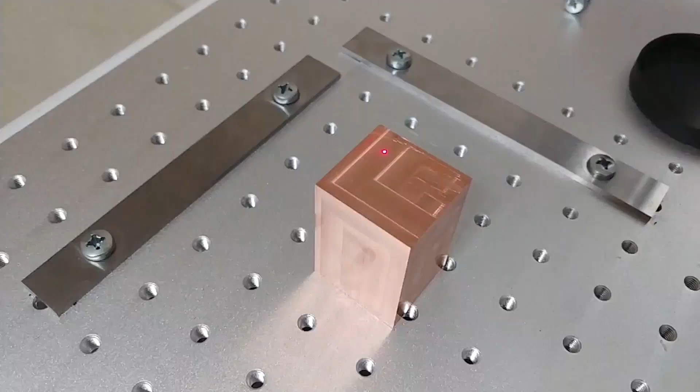Somebody mentioned in the comments of my previous copper marking video that they were having some trouble getting depth in copper with a 50 watt laser, and I've got a 20 watt laser, so I figured I'll give it a shot and see if I can do it.

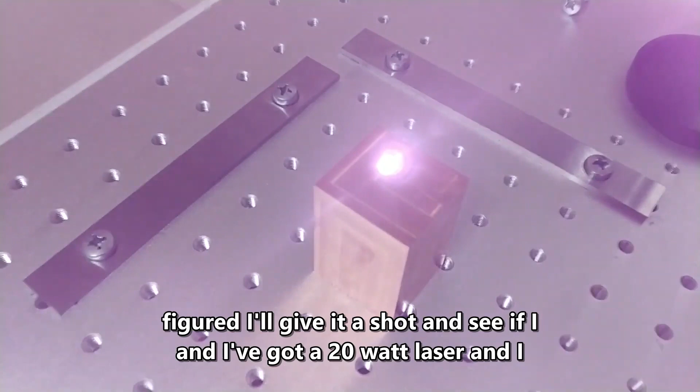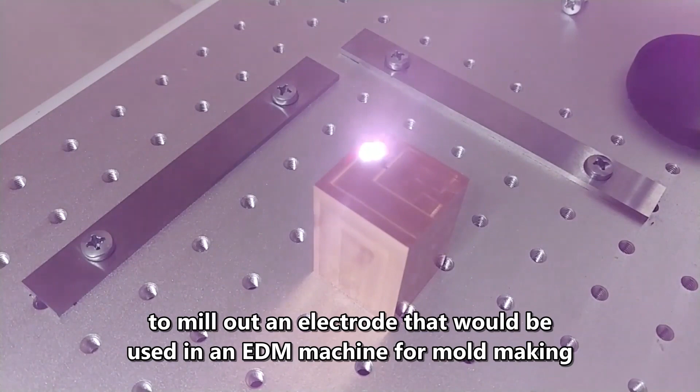What you see here is EDM grade copper, and I'm not positive what that means, but it is what you would use to mill out an electrode that would be used in an EDM machine for mold making. This block has been squared off, and I've already started to mark it. What I'm doing here is just marking an X, and I'll go through the settings right now.

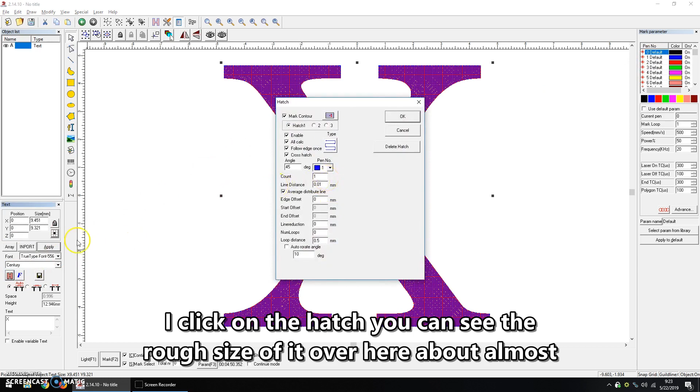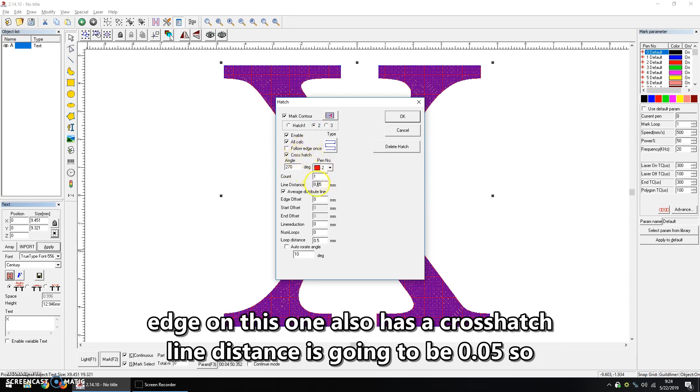These are the settings I used for this X. Let's go to the hatch first. If I click on the hatch, you can see the rough size, about almost 10 by 10 millimeters. I'm using this pattern for the hatch, enabling everything including a cross hatch starting at an angle of 45 degrees. I'm using pen number 1, a line spacing of 0.01 millimeters, and I'm also doing a second hatch at 270 degrees. This is a different pen, pen 2, not following the edge on this one, also has a cross hatch. Line distance is 0.05, so that'll be a lot faster.

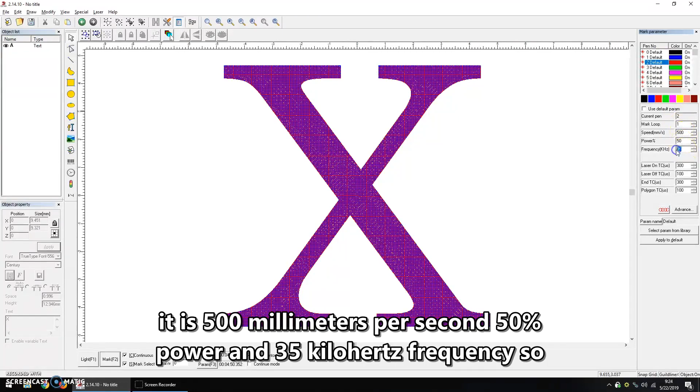I'm going to cancel that, deselect the X, go to pen 1. My pen settings are 100 millimeters per second, 90% power, this is a 20 watt laser, and 20 kilohertz frequency. For pen 2, for the second hatch, it's 500 millimeters per second, 50% power, and 35 kilohertz frequency. Total marking time here was just under 5 minutes, at 4 minutes 50 seconds.

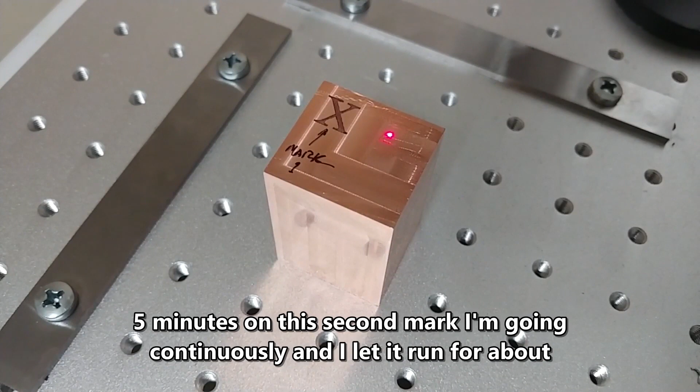There's a little bit of debris that needs brushed off on the top, and the mark will look a little bit better after that. I'm going to mark another X, and then we'll take this to the surface plate after that and actually see the depth. On mark 1, this was just set to run continuously, and I let it run for about 5 minutes. On this second mark, I'm going to have it run for 8 total repetitions. So it's going to go right there, let's do it.

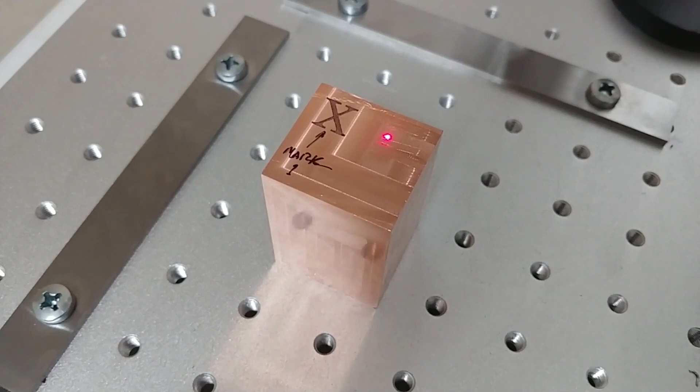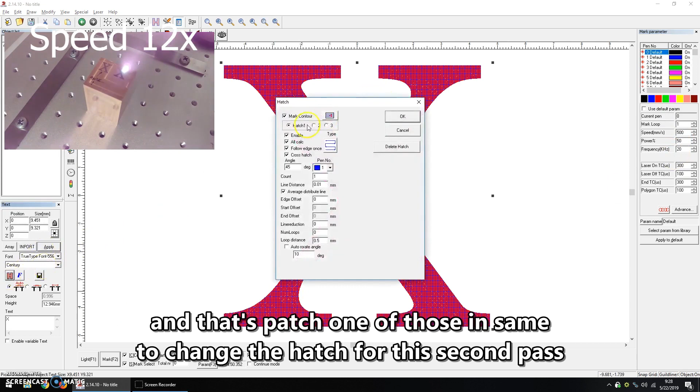For the second attempt, I'm going to get a little bit adventurous, and I'm going to leave pen 1 settings the same, but pen 2 I'm going to change to 700 millimeters per second with 50% power and 50 kilohertz frequency. I'm also going to change the hatch for the second pass, hatch 1 is going to stay the same, hatch 2 is going to be 0.03 millimeters now. I'm going to leave the angles the same and everything else the same.

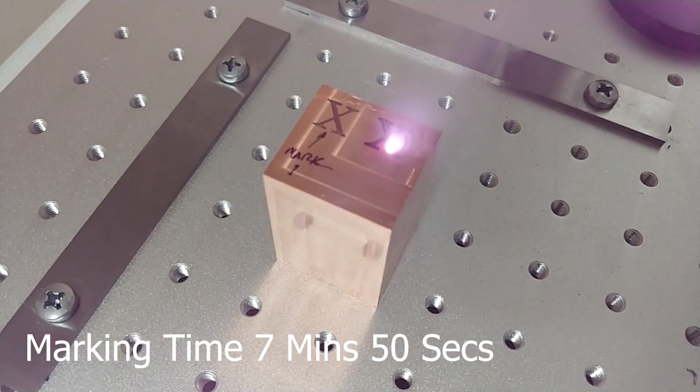Alright, so that's 8 passes. Let's take it down to the surface plate and see how we did for depth.

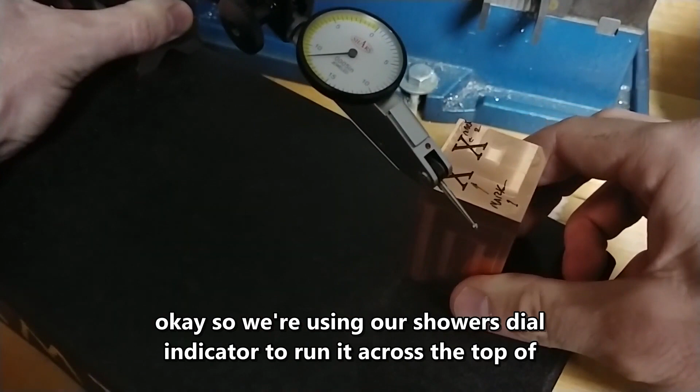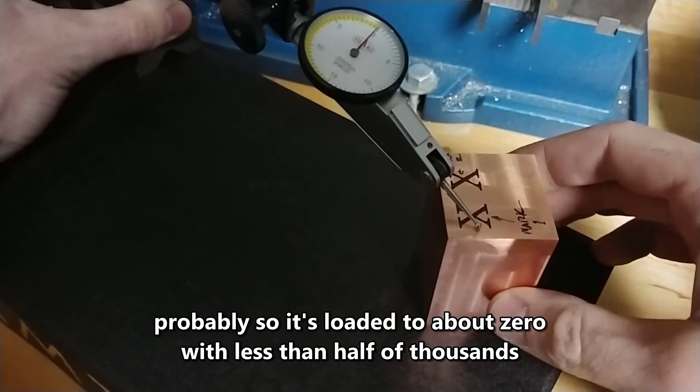We're using our Starrett dial indicator to run it across the top of this block. I squared this block a while ago in my Tormach, it's relatively square on the sides, end to end, within less than half a thousandth probably. It's loaded to about 0 right now. You can see the indicator. This is our first mark right here, it took about 5 minutes, and the max depth on that is about 8 thousandths.

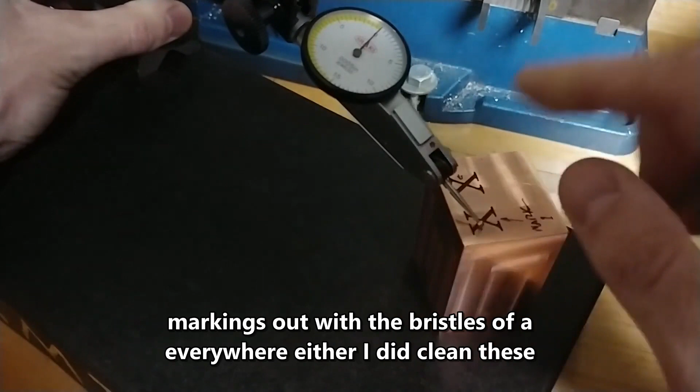I don't really see much of a lip here. There's a little tiny one right there, about 1 thousandth at most, not everywhere either. I did clean these markings out with the bristles of a toothbrush too.

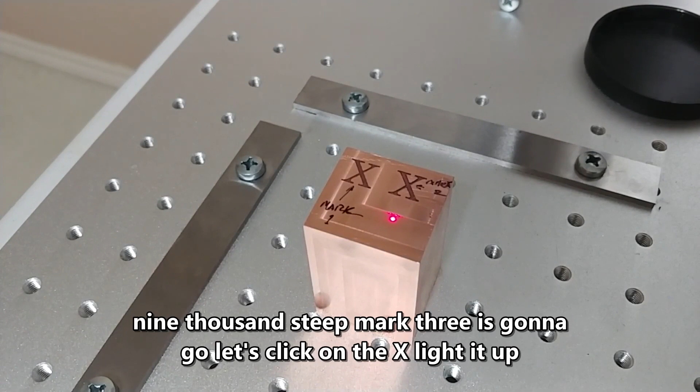So I've got marks 1 and 2 labeled there, mark 1 was about 8 thousandths deep, mark 2 was about 9 thousandths deep. Mark 3 is going to go, let's click on the X, light it up right there. I'm going to do a total of 8 passes again, let's do it.

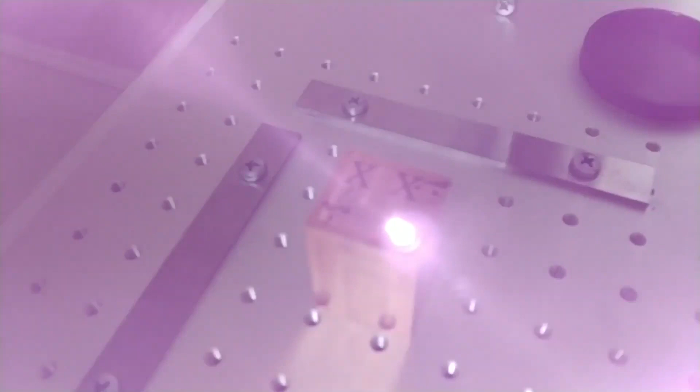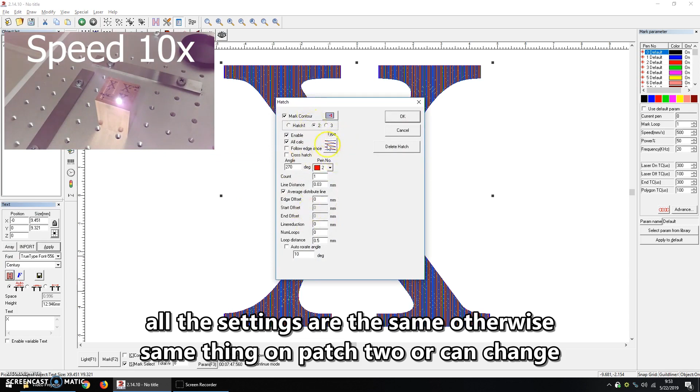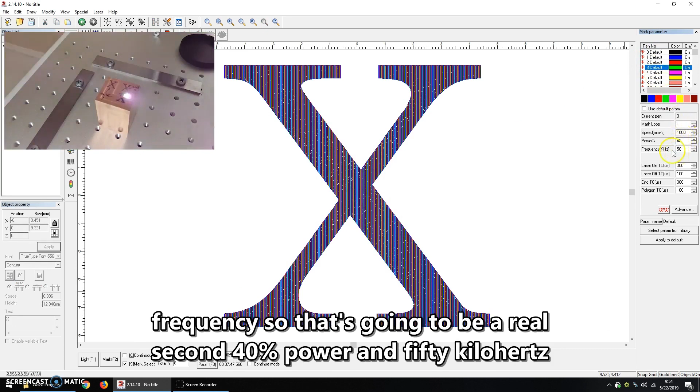I'm going to try this X once more, and I'm going to make 2 changes. If I click on the X and go to the hatch, you can see I've changed the pattern. On hatch 1, all the settings are the same otherwise. Same on hatch 2, we're changing the pattern, settings are the same otherwise. I did add a third hatch, it's going to happen at 90 degrees, using pen 3, with a line spacing of 0.05 millimeters, no cross hatch on this one. For pen 3, other settings are the same as the second mark: 1,000 millimeters per second, 40% power, and 50 kilohertz frequency. That's going to be a real fast pass. I don't know if this change in pattern and the cleanup pass for the third pen is going to have any impact, but let's find out.

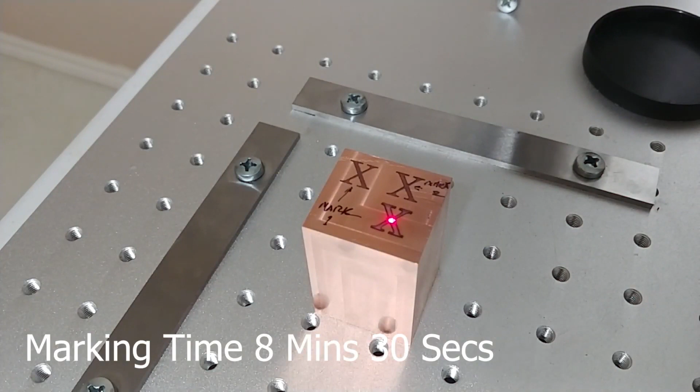All right, that's 8. Let's take it down to the surface plate. So here's the second mark, we're pretty much on 0 there.

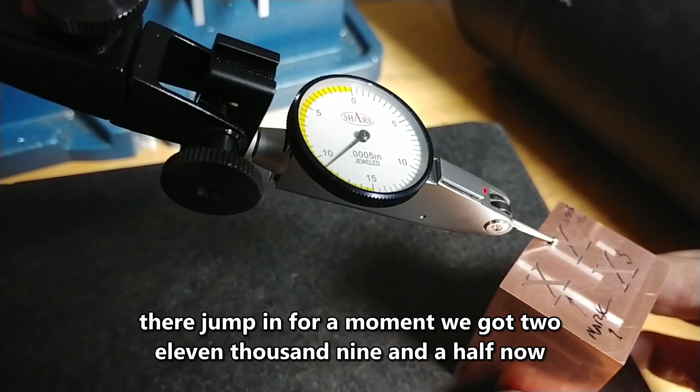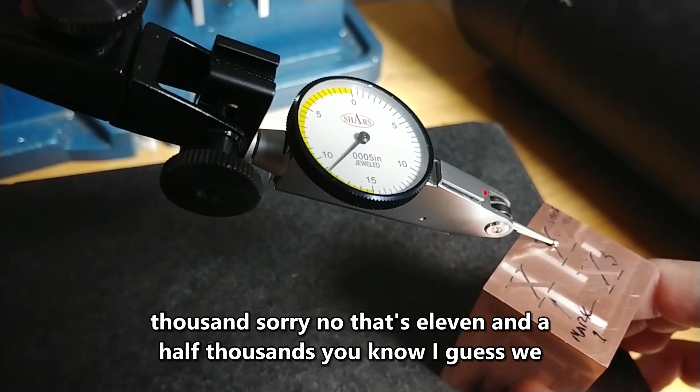For a moment we got to 11 thousandths, 9.5. Now that's the center, so I would think my ball is about as deep as it can be there. And that's already showing about 12 thousandths, almost 12. Sorry, no, that's 11.5 thousandths. No, I guess we didn't quite get further than that. And this will be the third marking, I would imagine. We're looking at about 10. We go to the center and about 11.

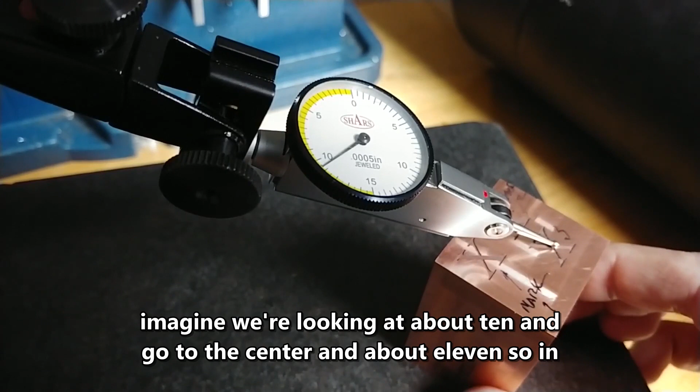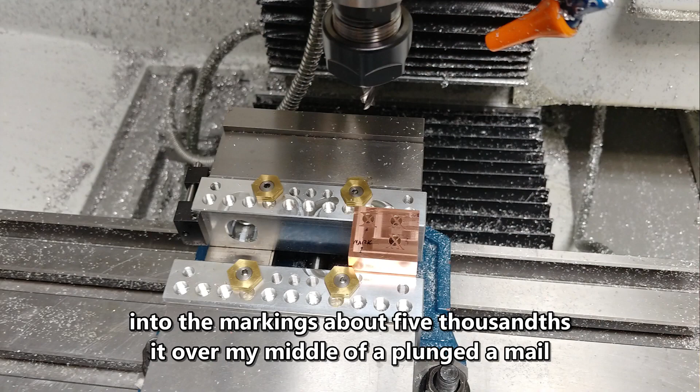In running this indicator over the markings, I felt that maybe the ball wasn't bottoming out completely, so I took it over to my mill and plunged an end mill into the markings about 5 thousandths, and just verified that the indicator was actually bottoming out, and it was, so the full depth was actually measured. Here's a picture of the end result.